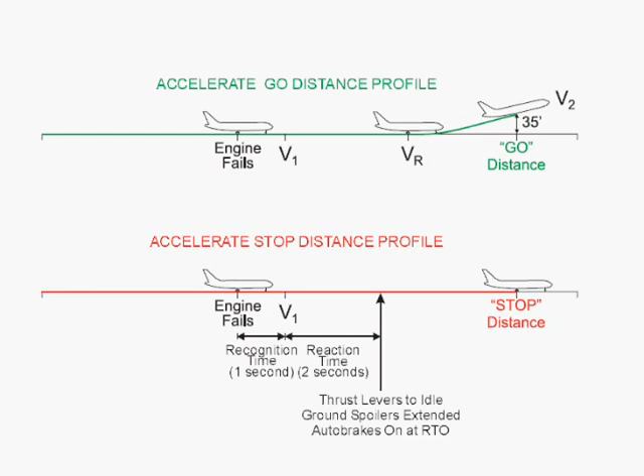This simulation compares accelerate stop and accelerate go distances for a wide-body jet transport making a flaps 5 takeoff. We can select 3 different gross weights, 2 altitudes, and 2 clutter conditions, as well as the engine failure recognition speed, which is 1 second after the actual engine failure.

We will set the gross weight to 267,000 pounds and the engine failure recognition speed to 0. This allows us to look at the extremes. We will first look at a single engine takeoff, starting with the flight deck view.

Observe how the EPR setting starts off at a low value and gradually reaches the takeoff power setting of 1.43 when the speed reaches 114 knots. This gradual power increase is necessary because rudder authority and nose wheel friction cannot cancel out the yawing moment created by the operating engine on this twin-engine jet with wing-mounted engines.

Maximum rudder deflection is held during this acceleration. The minimum speed at which maximum rudder deflection can cancel out the yawing moment caused by takeoff thrust set on the operating engine is VMC ground, which in this case is 114 knots.

Since an engine out takeoff can never be continued at takeoff thrust from a speed below VMC ground, the only option is to immediately move the thrust levers to idle and abort the takeoff. Since there is no option to go, V1 can never be less than VMC ground, and therefore the minimum V1 is equal to VMC ground.

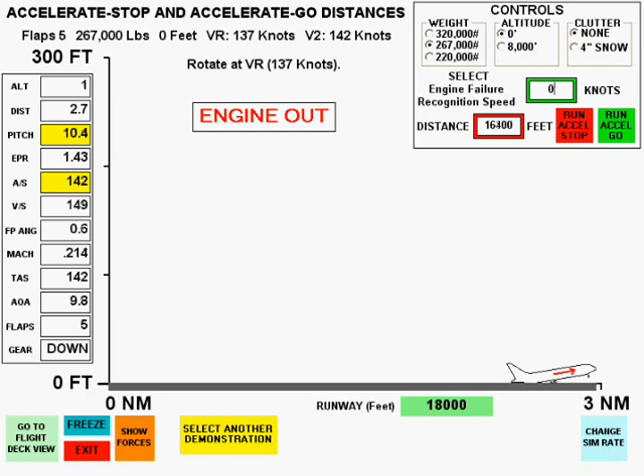Notice the unrealistically long takeoff distance, even for this moderate gross weight. We will now look at the accelerate stop distance. Notice the expected result. What we see in this extreme case is that for low engine failure speeds, the accelerate go distance is much longer than the accelerate stop distance.

Next, let's look at the opposite extreme, an engine failure at VR. The following simulations are done at 8 times the normal speed, since the final distance is our primary interest.

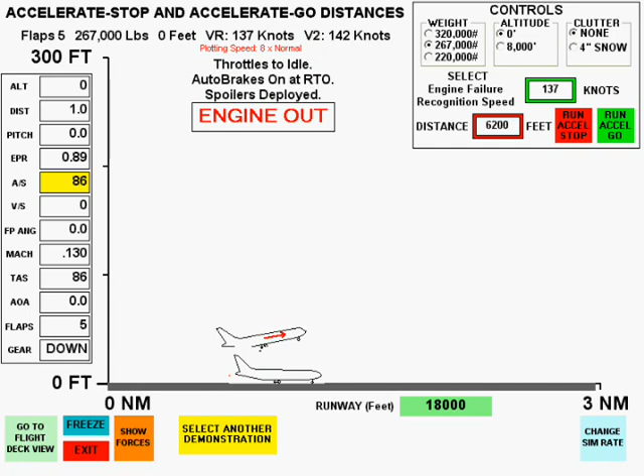Notice that in this case, at the maximum engine failure speed VR, the accelerate go distance is much shorter than the accelerate stop distance. Therefore, an engine failure recognition speed that makes the two distances nearly equal, i.e. the V1 for balanced field length, must lie between V1 min, which is VMC ground, and VR.

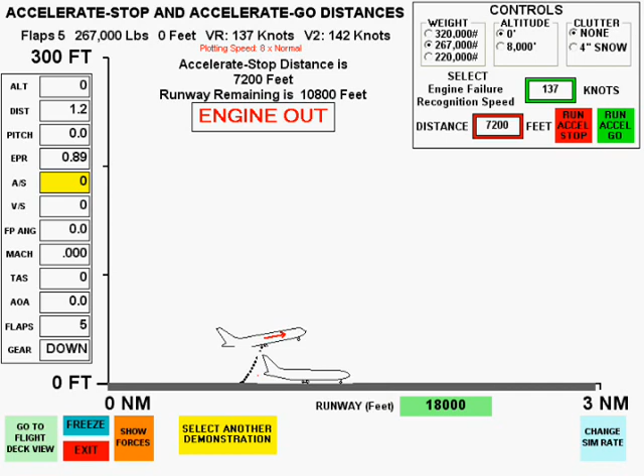Next, let's look at both go and stop distances with an engine failure recognition speed of 129 knots. Since both distances are essentially equal, the balanced field length V1 for these conditions is 129 knots.

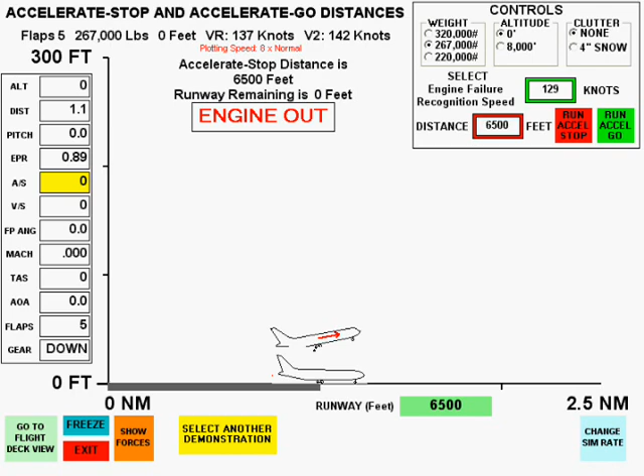Until we look at the effect of longer runways, V1 means the value that produces equal stop and go distances. In other words, the balanced field length value. Now let's look at the effect of increased weight.

Setting the gross weight to 320,000 pounds, where the V1 is 145 knots, we see the following result. At the lesser weight, a legal takeoff could be made on a 6,500 foot runway, but at this heavier weight, at least 9,100 feet is required. So, heavier weights require longer runways and higher values of V1.

Let's increase the altitude to 8,000 feet, where V1 is 147 knots.

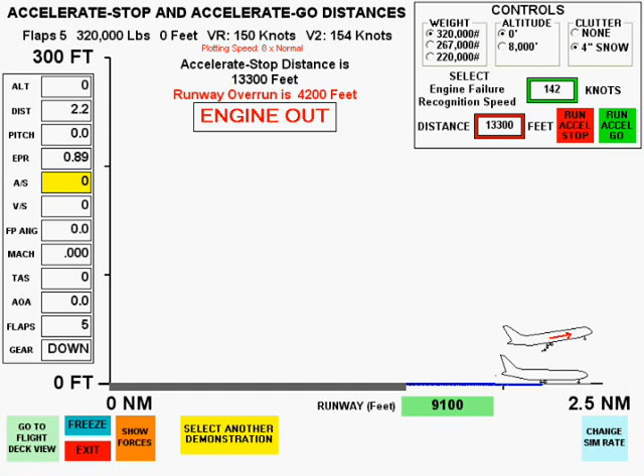Notice that the effect of 4 inches of snow are similar to the effect of 8,000 feet of altitude. We'll now reduce the weight to 267,000 pounds and V1 to 123 knots, where a legal takeoff can be made on a 9,100-foot runway.

To this point, we have looked at V1 strictly from an engine failure and legal takeoff perspective. Now we will look at some practical considerations, such as what if the runway is shorter or longer than the balanced field length, and what if the go or no-go decision is precipitated by events other than an engine failure, such as a fire or configuration warning.

Let's consider a runway shorter than the balanced field length. First, let's look at the runway required for an all-engines takeoff.

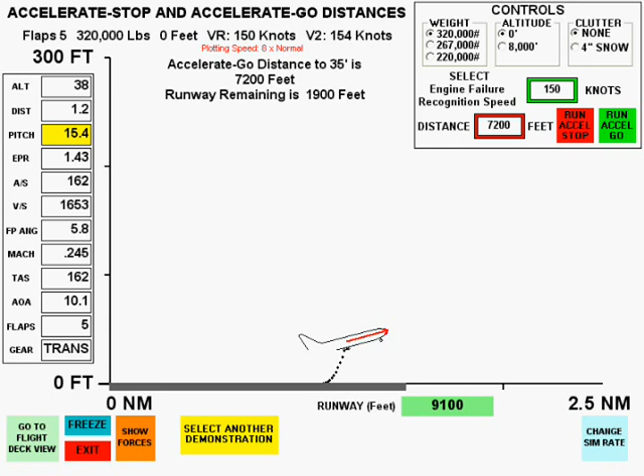Let's take another look at the balanced field length condition, where V1 is 145 knots.

Now let's assume that the runway length is 8,400 feet and try a takeoff with an engine failure recognition speed of 139 knots. Notice in this case we can stop, but we can't go.

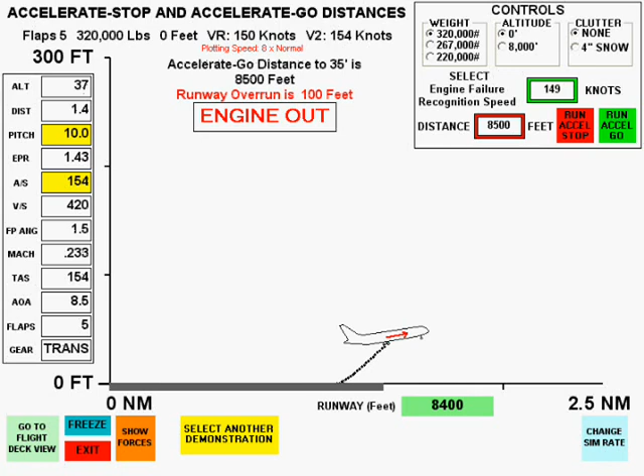Now let's try an engine failure recognition speed of 149 knots. In this case, we can just about go, but we cannot stop.

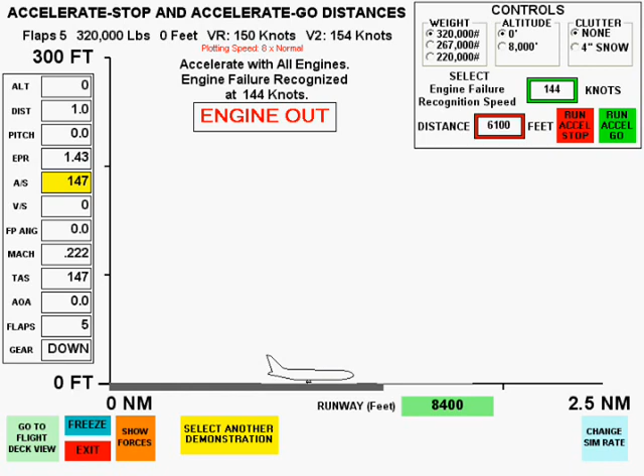Now let's try an engine failure speed of 144 knots. What we have learned from this exercise is that if the runway length is less than the balanced field length, there is a range of engine failure speeds in which there is no safe option, since both the stop and go distances are longer than the available runway. In this case, an engine failure below 139 knots would allow a safe stop, and an engine failure speed above 149 knots would allow a safe takeoff. But an engine failure at any speed between 139 knots and 149 knots would have no safe result. This is not allowed for commercial operations.

We should also note that for a runway less than the balanced field length, there can be no V1 defined, since there is no one speed below which you can stop and above which you can go. There is a separate stop speed and a separate go speed, with a range of speeds in between that have no good outcome.

Now let's consider a runway longer than the balanced field length. Consider a 9,800-foot runway and an engine failure recognition speed of 139 knots.

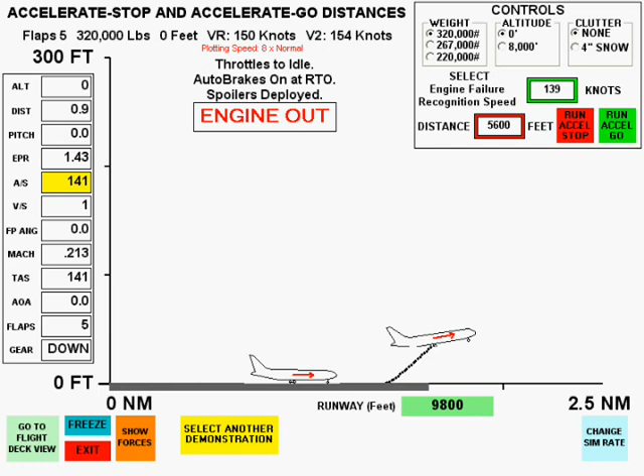With an engine failure recognition speed of 139 knots on this 9,800-foot long runway, we can easily stop and just barely go.

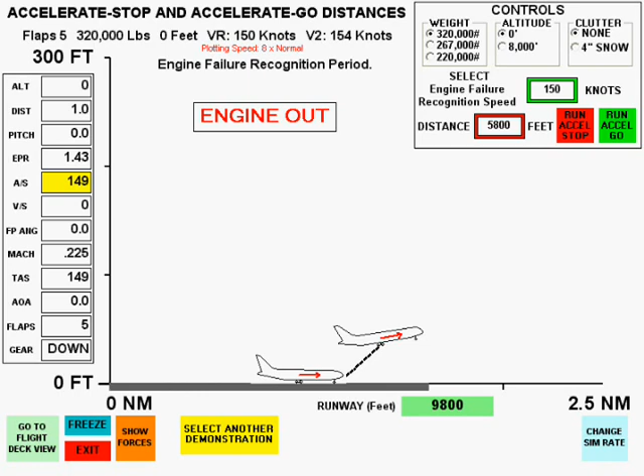Now let's try a takeoff with the engine failure recognition speed equal to VR, which is 150 knots. In this case, we can easily go, but just barely stop.

Now let's try to take off with an intermediate engine failure speed, 145 knots, which is the V1 for a balanced field length.

Note that in this case, where the available runway is longer than the balanced field length, there are a number of speeds that meet the criteria for V1. In this example, where the available runway length is 9,800 feet, we could choose a V1 anywhere between 139 knots and 150 knots. A V1 of 139 knots provides the best safety buffer for stopping, while a V1 of 150 knots provides the best safety buffer for going.

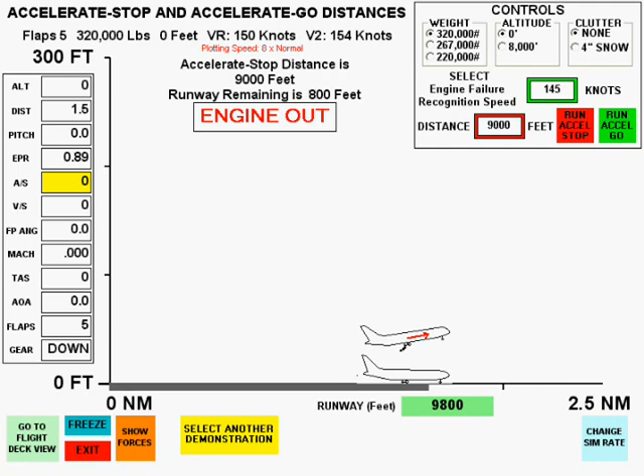We know that a legal takeoff must have a runway at least equal to the balanced field length. If the available runway is longer than the balanced field length for our takeoff weight, we can select the value of V1 from a range of airspeeds. The value of V1 for the balanced field length always lies near the middle of the range of allowable values of V1, and is therefore somewhat of an average.

So what are the factors that would cause us to select a V1 different than this average value? First, we should realize that there can be many factors other than an engine failure that could activate the decision to abort. Second, there are runway conditions that can seriously affect the stopping distance more than the go distance.

In order to abort the takeoff for almost any reason, we would like a runway long enough so that V1 could be equal to VR. On the other hand, if the runway is slippery, we would like to select the lowest possible V1 in order to minimize the stopping distance.

Traditionally, the flight crew gets their value of V1 from charts or the flight management computer. The effect of this V1 on accelerate stop and accelerate go distances is usually unknown to them. For runways longer than the balanced field length, some airlines use the V1 for the balanced field length, and others use V1 equal to VR if the runway is long enough. In addition, computations are usually available to find a lower V1 if the runway is slippery. In all of these cases, the runway remaining after stopping or going is usually not known to the crew.

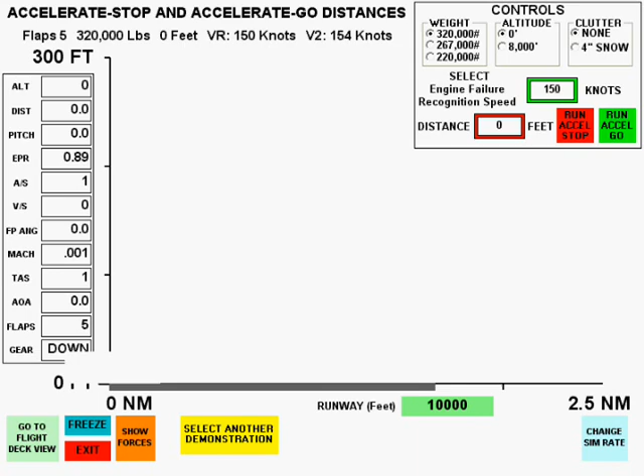Let's look at a specific example. Consider a takeoff on a 10,000-foot runway, using V1 equal to VR. The crew knows only that this runway meets legal takeoff requirements.

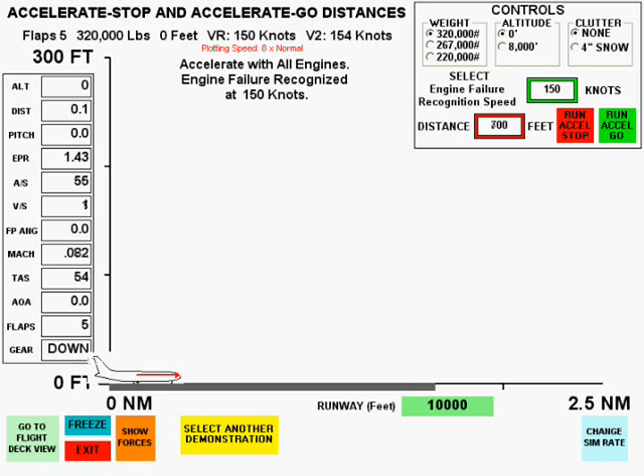If the crew had to abort and knew they would stop on the absolute end of the runway, they might select a lower V1.

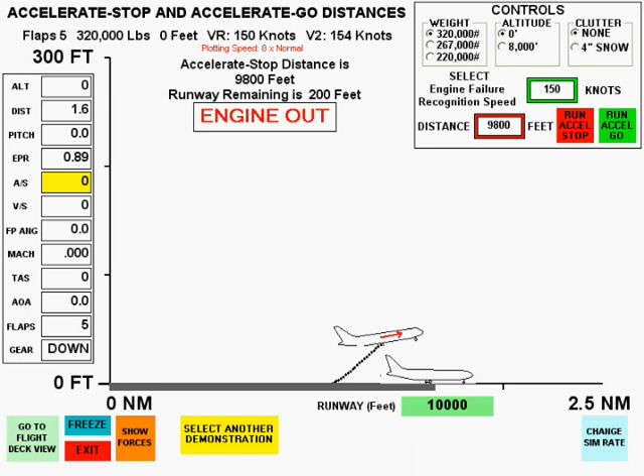At the other extreme, selecting the lowest allowable V1 makes for a tight takeoff if an engine fails at V1. Here's an example.

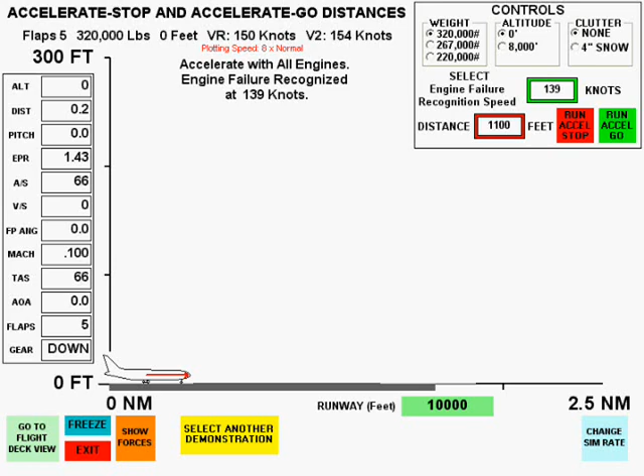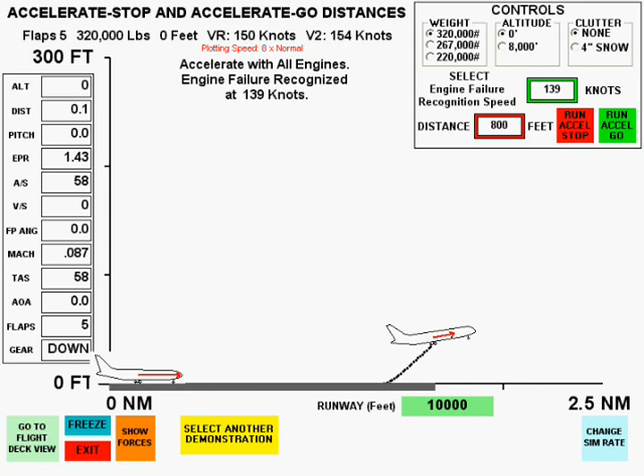Luckily, computers can easily provide the full range of allowable V1s and runway remaining data to the crew, so that they can exercise their professional judgment and pick the best V1 for the existing conditions. Let's look at an example.

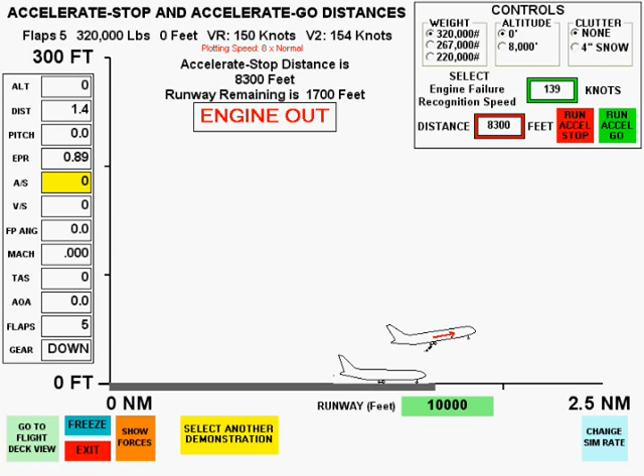Since the abort decision could be caused by many different reasons, the accelerate stop distance data does not involve an engine failure. Takeoff thrust is maintained until the throttles are brought to idle, which increases the accelerate stop distance slightly compared to the engine-out case.

On the other hand, if the runway is 12,000 feet long, with the stop runway remaining being 2,000 feet, V1 equal to VR would not be a problem.

What if the runway is slippery? A wet runway that is not cluttered has little effect on the accelerate go distance, but can seriously affect the accelerate stop distance. In this case, a low V1 can be selected in order to maximize the runway remaining if an abort is necessary. Some airlines refer to this as the slippery runway V1, but many have stopped using this terminology.